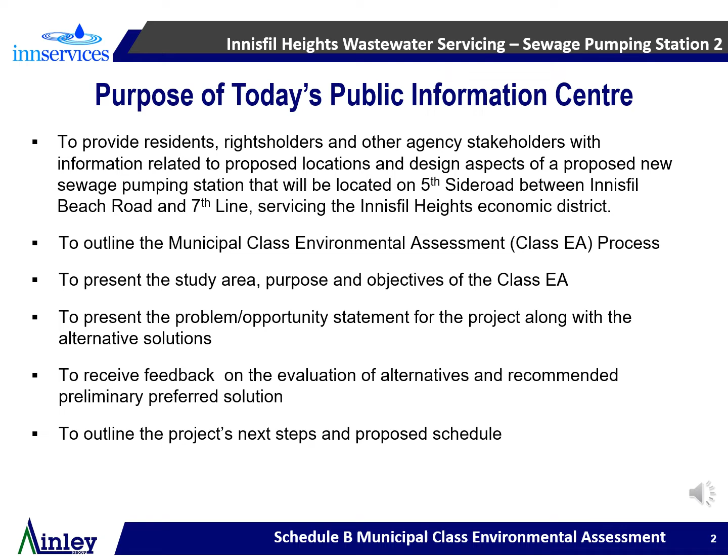To outline the Municipal Class Environmental Assessment process. To present the study area, purpose, and objectives of the Class EA. To present the problem opportunity statement for the project along with alternative solutions. To receive feedback on the evaluation of alternatives and recommended preliminary preferred solution. To outline the project's next steps and proposed schedule.

Background of the Class EA process. A municipality is required to conduct a Municipal Class EA before this type of infrastructure improvement project can proceed to construction. A Municipal Class EA follows an approved planning process designed to protect the environment and to ensure compliance with the Environmental Assessment Act.

The purpose of the Environmental Assessment Act is to provide for the betterment of the people of the whole or any part of Ontario by providing for the protection, conservation, and wise management in Ontario of the environment. The term environment is broadly defined and includes the built, natural, socio-economic, and cultural environments.

The process requires the evaluation of potential solutions and design concepts so as to select a suitable approach that will address the problem opportunity but also keep impacts to a minimum.

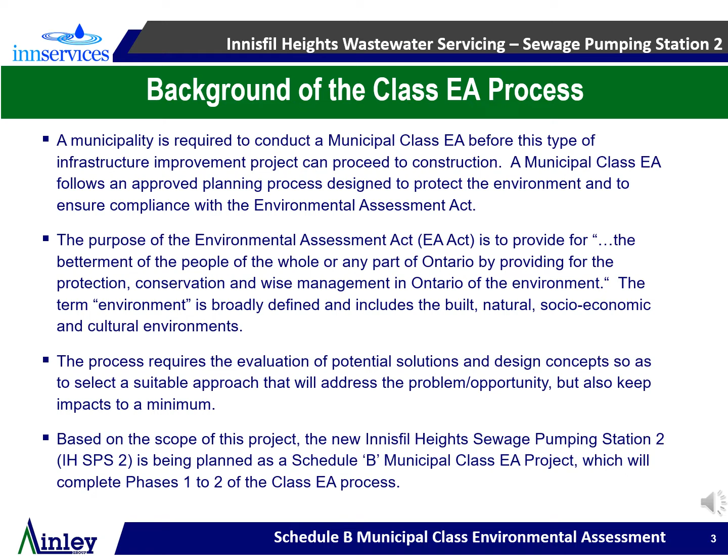Based on the scope of this project, the new Innisfil Heights Sewage Pumping Station 2 is being planned as a Schedule B Municipal Class EA project, which will complete phases 1 and 2 of the Class EA process.

The Municipal Class Environmental Assessment describes the process that InnServices must follow to meet the requirements of the Ontario Environmental Assessment Act. This Schedule B project will complete phases 1 and 2 outlined in this flowchart.

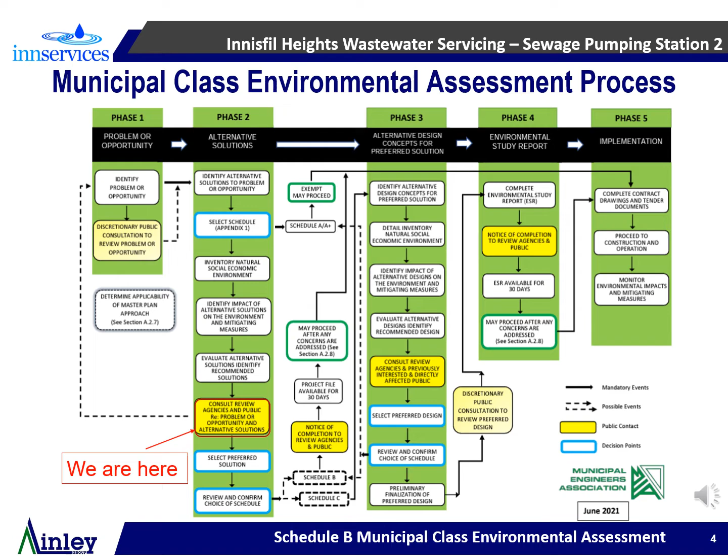Study purpose and objectives. Purpose: InnServices Utilities, Inc. completed a Master Servicing Plan update in 2018, which identified wastewater servicing strategies to accommodate the population and employment growth outlined in the Innisfil Official Plan.

The purpose of this Class EA is to identify a suitable location for the proposed new Innisfil Heights Sewage Pumping Station 2 to be located on 5th Sideroad between Innisfil Beach Road and 7th Line in the town of Innisfil. The sewage pumping station will receive flows from the Innisfil Heights economic area and direct them to the Lakeshore Wastewater Treatment Plant.

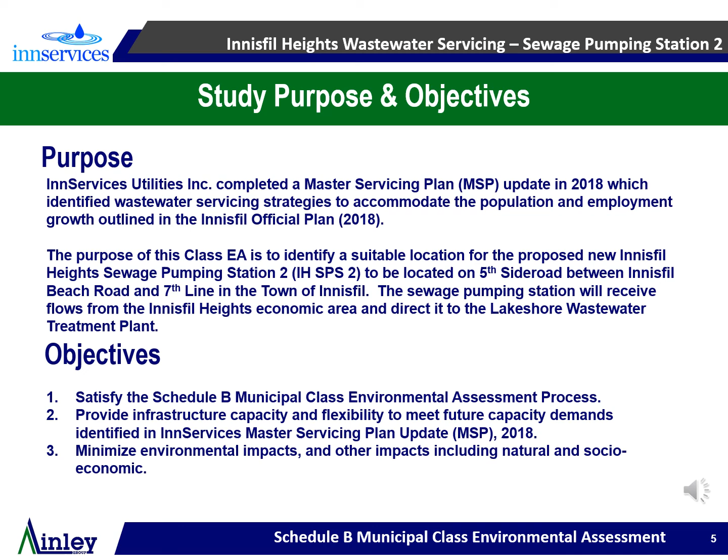Objectives: Number 1, satisfy the Schedule B Municipal Class Environmental Assessment process. Number 2, provide infrastructure capacity and flexibility to meet future capacity demands identified in InnServices Master Servicing Plan update. And number 3, minimize environmental impacts and other impacts, including natural and socio-economic.

Study background. As part of the Master Servicing Plan, various alternatives were examined in order to provide servicing for the first phase of the Innisfil Heights Economic District expansion, an area designated as a strategic settlement employment area. In order to promote, facilitate, and maximize the planned expansion of this area, the Master Servicing Plan identified that a municipal sanitary sewage collection system is required.

The Master Servicing Plan identified Alternative 6, Option B, as the preferred option. Alternative 6 establishes a sanitary collection system connected to the Lakeshore Wastewater System via Innisfil Beach Road and 20th Sideroad for the first phase of development up to the year 2031.

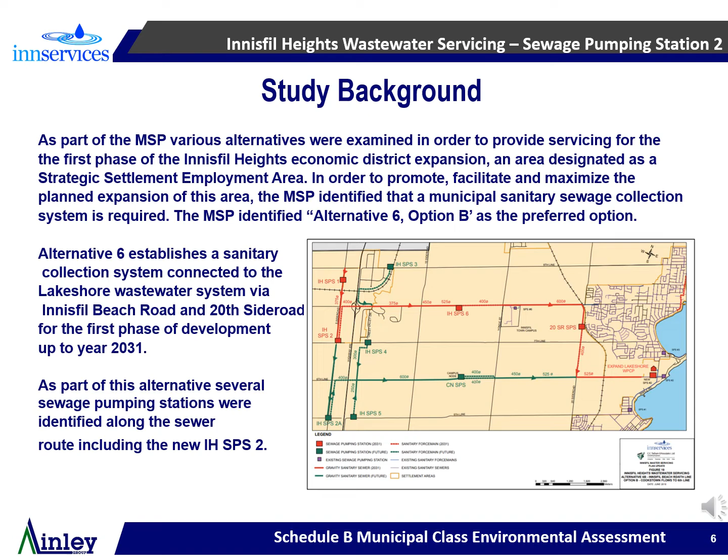As part of this alternative, several sewage pumping stations were identified along the sewer route, including the new Innisfil Heights Sewage Pumping Station 2. Study area.

The study area is defined as the overall area bounded by the east and west side of 5th Sideroad between Innisfil Beach Road and 7th Line, on which a new sewage pumping station can be located to best service the strategic settlement employment area.

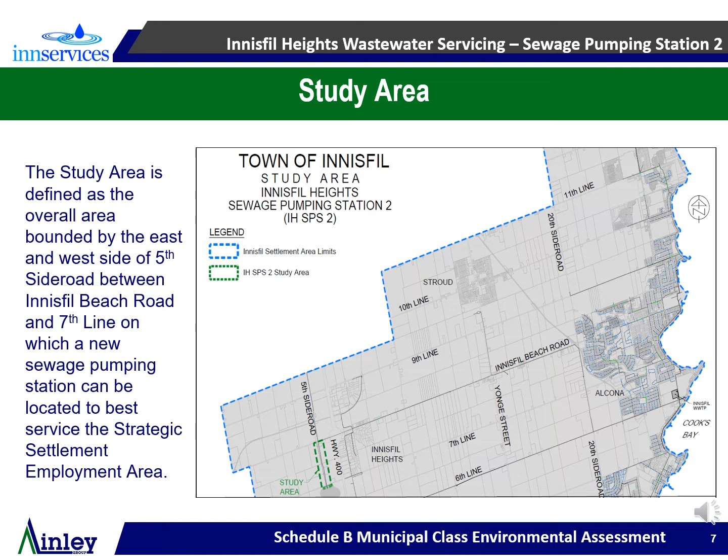Problem Opportunity Statement: Identify and develop a preferred solution location for the new Innisfil Heights Sewage Pumping Station 2 on 5th Sideroad to meet the future capacity requirements of the strategic settlement employment area.

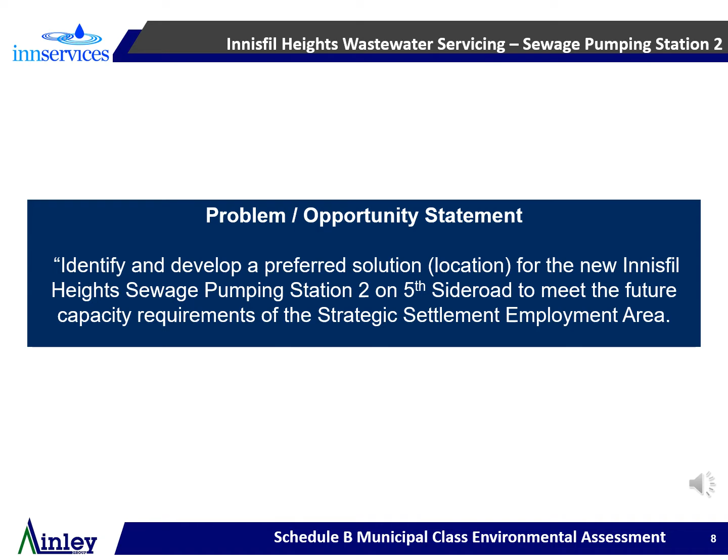Existing environmental conditions. Various studies have been completed to determine existing environmental conditions as well as to identify any potential impacts the alternative solutions pose to the environment within the study area. The studies looked at the natural, cultural, and social environments. The observations of these studies are further outlined herein.

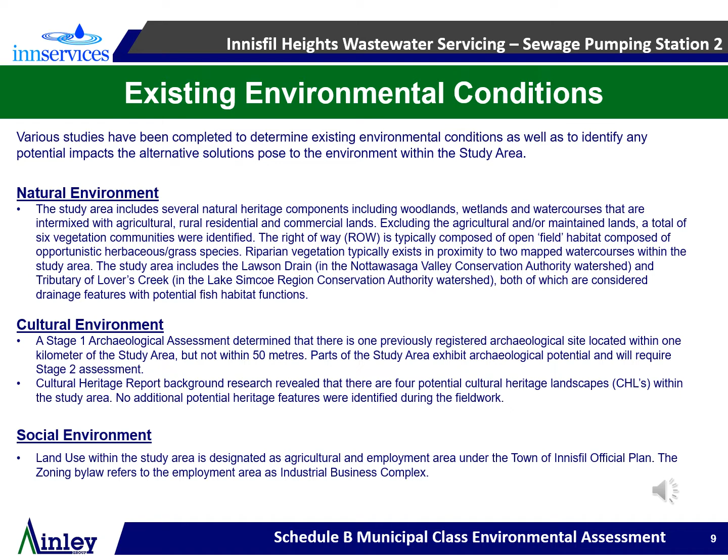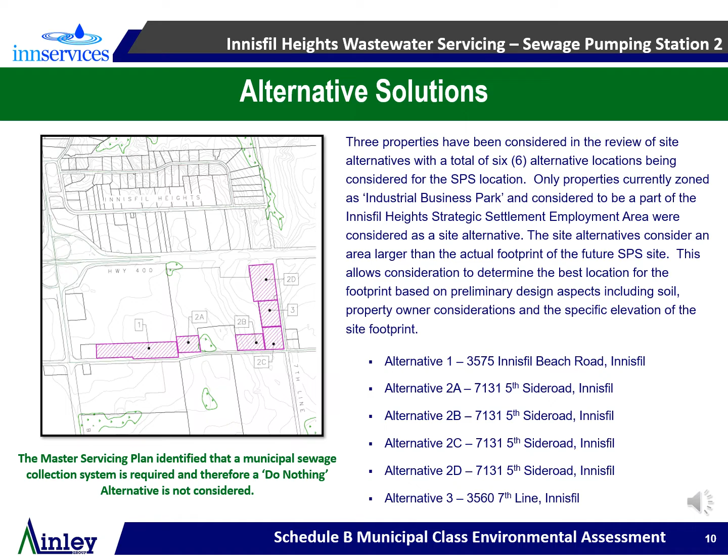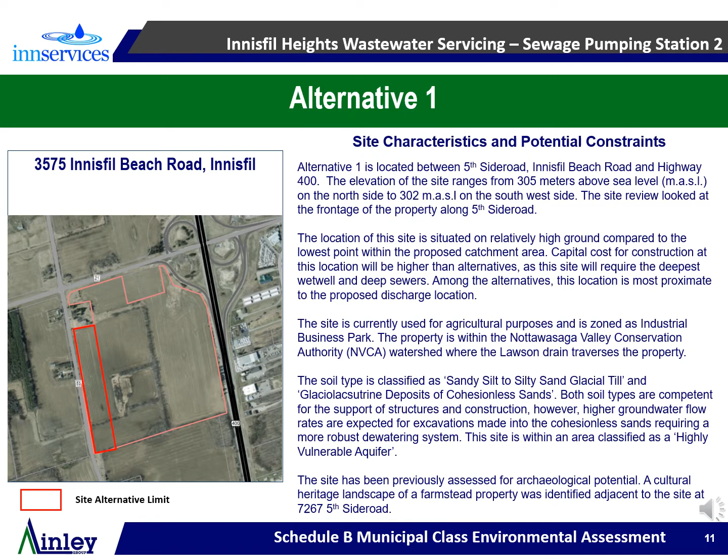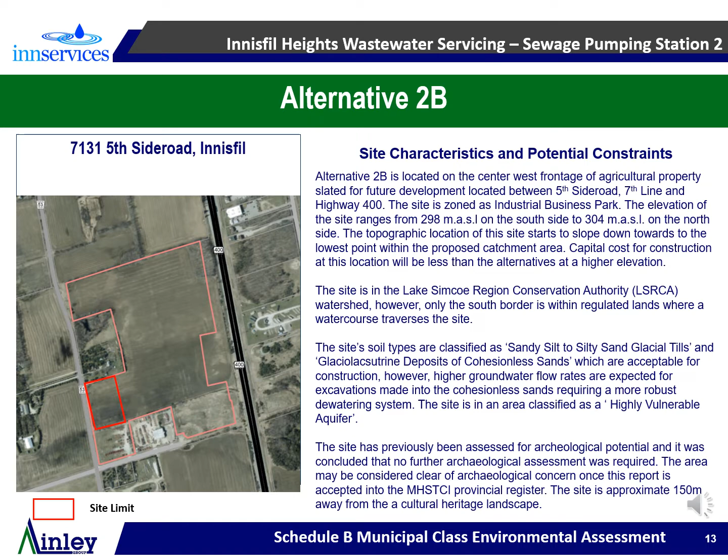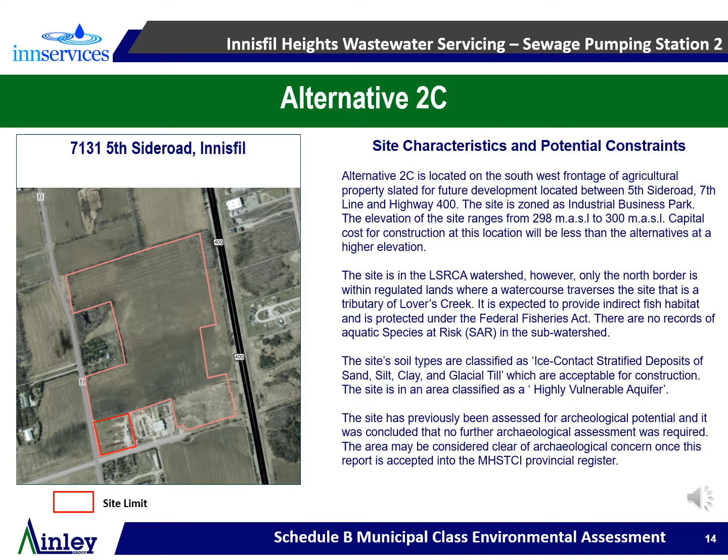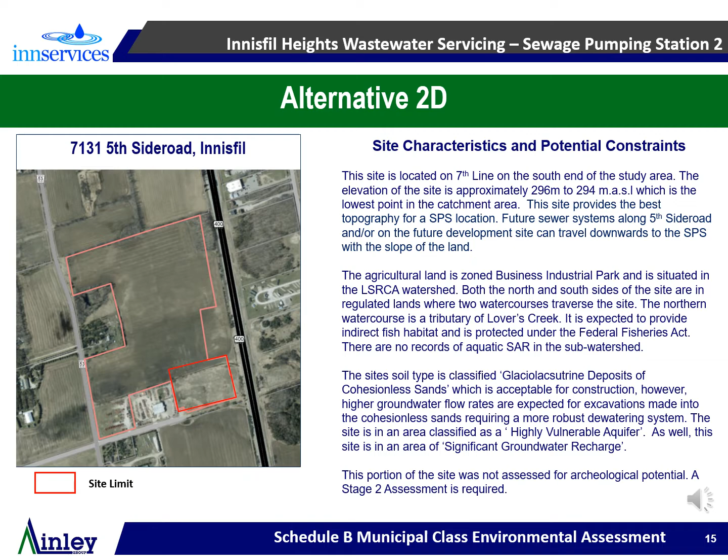Alternative 2D. This slide presents the site location for Alternative 2D, located at 7131 5th Side Road. The site characteristics and potential constraints are provided, outlining technical, environmental, social, and cultural considerations.

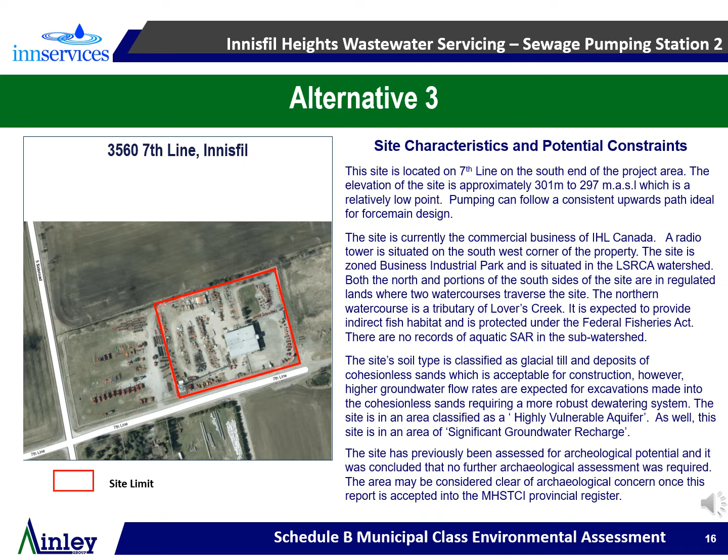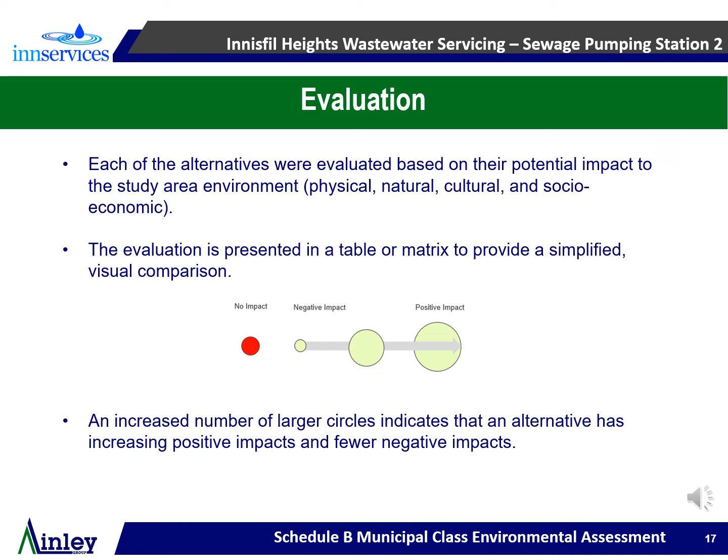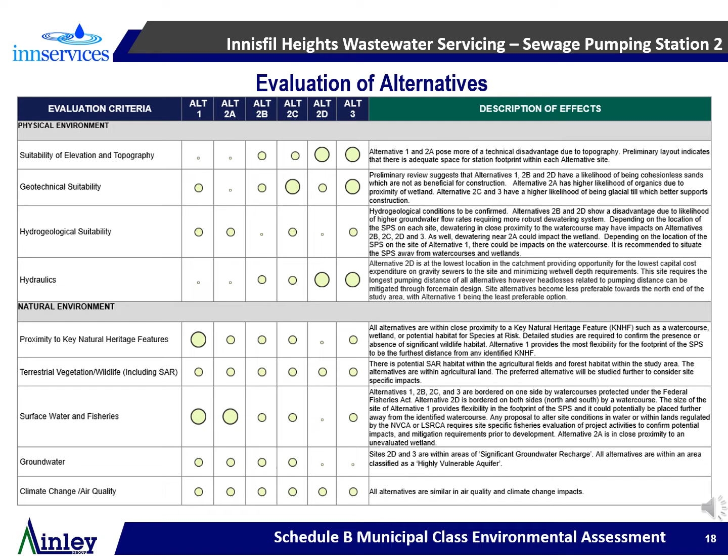Evaluation of alternatives. The evaluation matrix provides the results of the aforementioned evaluation. This slide examines the potential impact of each alternative in consideration of the physical environment and natural environment.

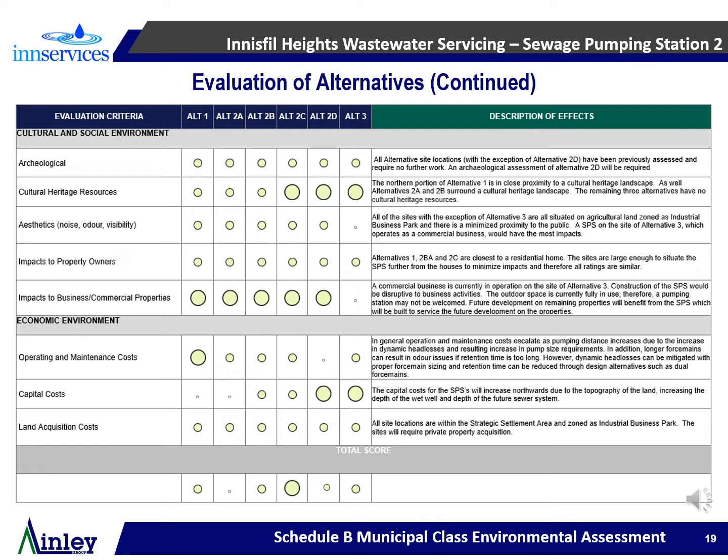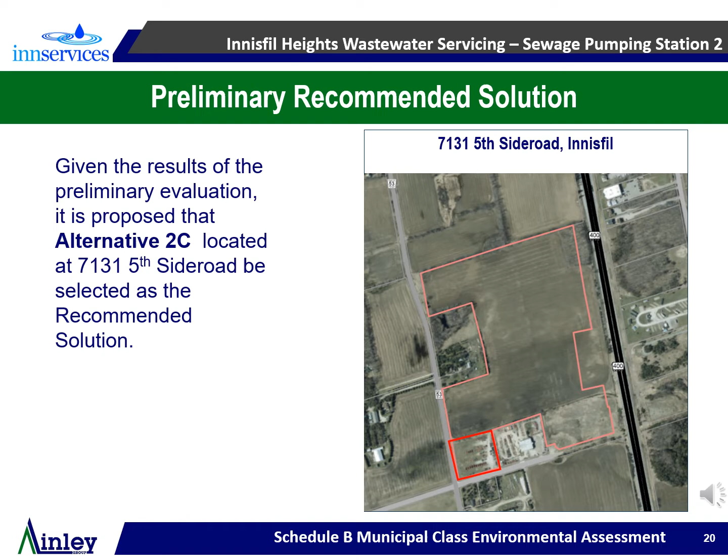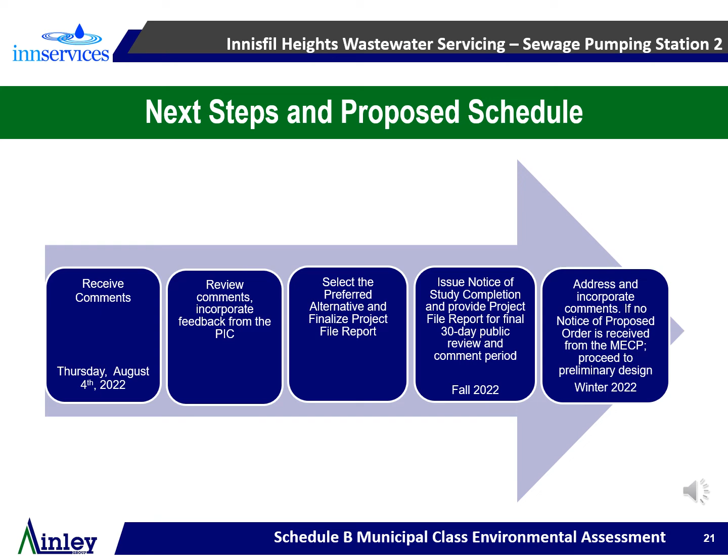Your comments are important to us. Comments may be sent to the study team by email or regular mail. Public input is encouraged throughout this process and will be given consideration during the planning and design of this project.